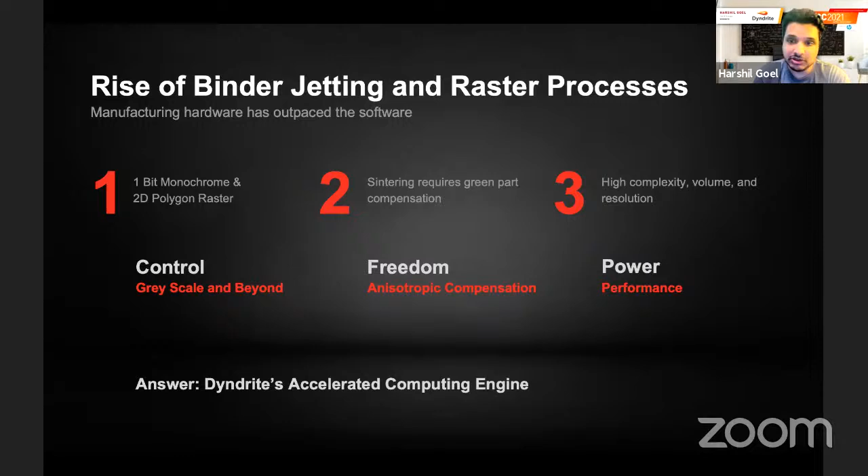I'm thrilled to announce the set of raster processes, announcements, and APIs that we've developed. I believe that they're going to dramatically push the limits of what's already possible. They're certainly pushing them already with a number of key partners. You can imagine what we're probably trying to do with Xaar to simply push the limits of what a printhead could even do.

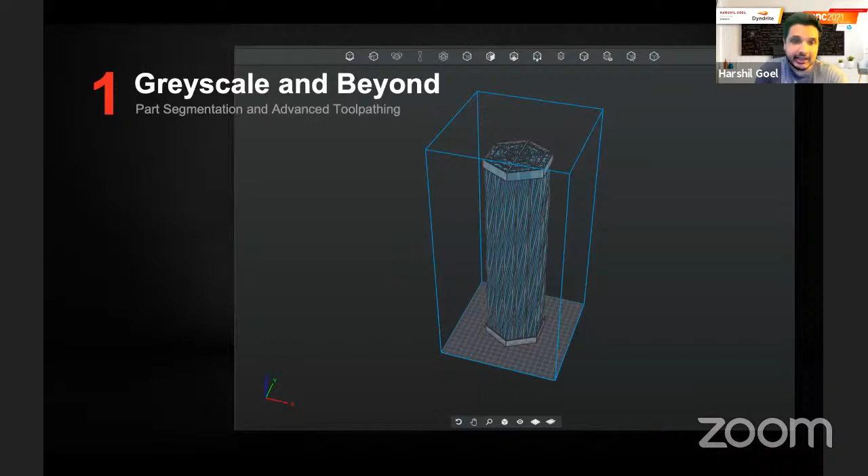So let's dive in a little bit deeper into one of these topics, grayscale. The idea here is when we have parts, we want to segment them and we want to apply advanced toolpathing. In a raster setting, advanced toolpathing can mean all sorts of things like dithering, anti-aliasing, etc. We're today going to be focusing on grayscale and beyond.

The idea is to take a part and divide it up into all of its key segments, whether it be the core, the shell, whether it has a lattice structure, the outside, the inside, specific areas near the shell. The idea is that we can embed metadata into all these processes.

But to what end? What you're seeing here is a high DPI image that has come out of the engine. The idea is to take this data and dramatically improve the printing process, whether we're enabling functionally graded materials, creating an efficient way of generating challenging bit files, or handling metallic components and exposing different ways to make improved coils, heat exchangers, nuclear reactors, etc.

The idea here is we can use this grayscale to fundamentally solve major physical and material graded problems. With this extra dimension now available in the toolpaths, the types of parts that people can make have significantly improved. We suspect people will use this to improve part quality and finish, because now you can have a graded grayscale on the edges.

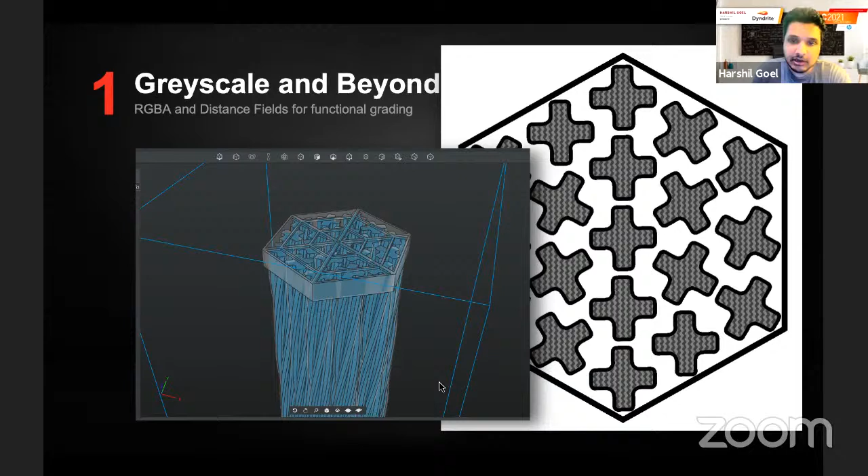The next key thing we'd like to talk about is anisotropic compensation. It's clear that for mainstream adoption, we need tighter tolerances, and this needs to happen much faster. We can't spend 10 to 15 hours compensating something just to print it and hope the green part comes out the right way. So to address this fundamental issue, we decided it made sense to create a number of geometric APIs for generalized anisotropic compensation.

The idea is that right now, if you give the engine 6 scalar values, 3 for scaling in X, Y, and Z, and 3 for offsetting or compensating in X, Y, and Z, you're able to attack these hard and difficult problems quicker, better, and faster. You're using the GPU to fully modify all of these images.

And what does this mean? It means more materials, more part families, more printer companies and ISVs generating IP, and faster qualification. The idea here is we're trying to build the tools to fundamentally accelerate how quickly people can develop sophisticated strategies. It's our goal to essentially be the best mathematicians in the room and enable every one of our partners to generate more IP to run their machines to the limit.

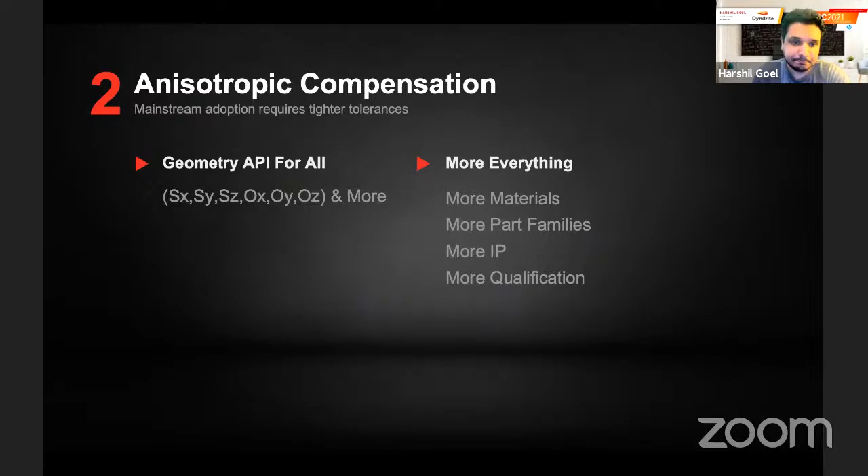Of course, showing anisotropic compensation is difficult because we're talking about microns, not meters. The idea here is we're specifically trying to show in this example how this anisotropic offsetting is being used in this raster process to calibrate the machine.

This is because we are offsetting in Z as well, and because it's a helix, we're just traversing further and further up the helix. Again, the idea here is not that we have invented the best way to compensate parts. The idea is we've been developing a generalized API so that more and more people can take a much more sophisticated approach to doing this.

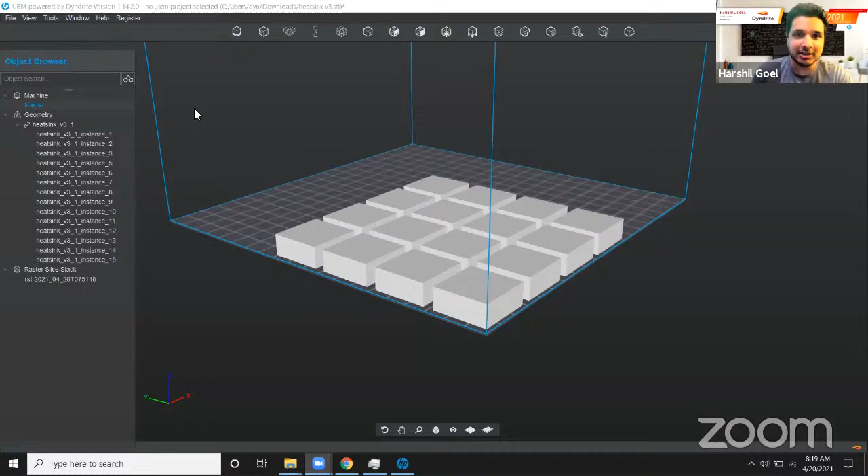Yes, all right. So what we have on the screen right here is a bunch of heat sinks. I have no idea how well this is coming across in the Zoom from a frame rate standpoint, but we are at 30 to 60 frames per second. And this is kind of a funny looking part.

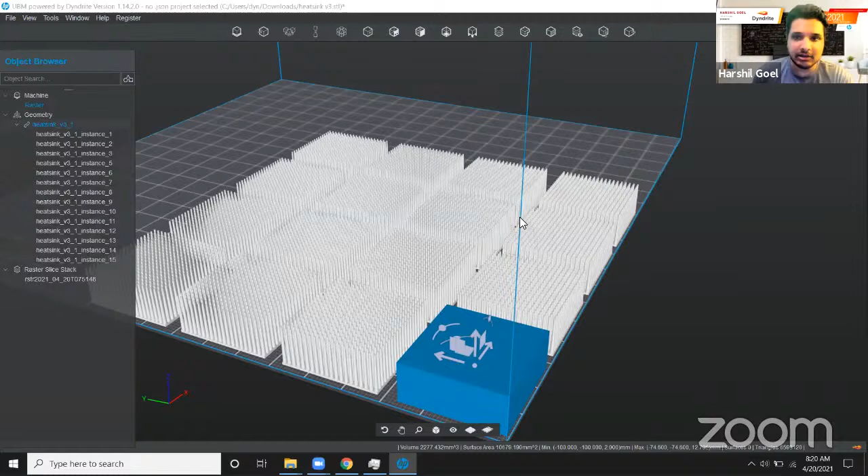The idea here is we're going to simply take this part and slice it at 50 microns. I will shut off the visualization so I can give the GPU as much memory as humanly possible. So let's hit apply.

But the idea is we're generating high resolution images for this heatsink, on the fly, live during the Zoom meeting, and we're already done. This is simply because the GPU has dramatically parallelized this process. So I'll stop sharing my screen and go back to the slides.

So why is this performance important? Well, a number of things, right? We're not doing performance for the sake of performance. We're doing performance for the sake of what it will engender and enable from a business process standpoint.

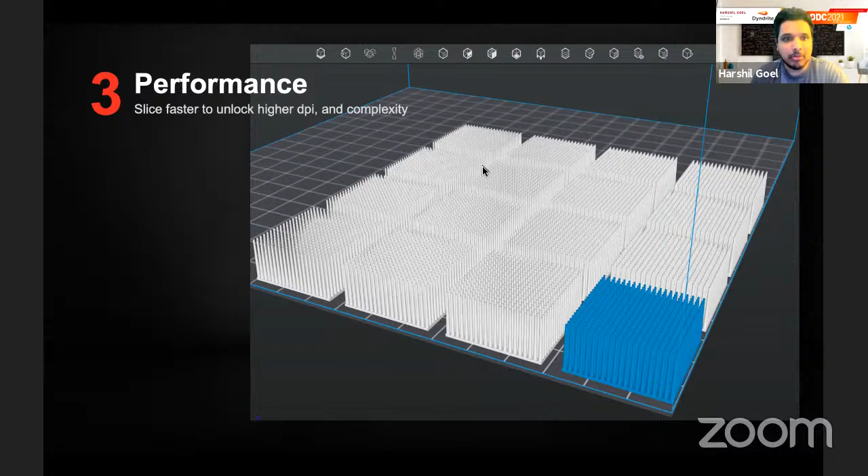Being able to slice significantly faster allows us to, A, try and test and simulate quicker, allows us to hopefully, B, keep up with the machine, and C, the performance is necessary because one of the key values of 3D printing is the fact that complexity is free.

But we all know that that's actually a lie. Complexity is not free. It's limited by your compute and your software. And so how can we, Dyndrite, figure out new and clever ways to use the existing software and hardware, and the new, for example, NVIDIA GPUs coming out, to push the limits of what's possible? Can we truly flip the paradigm of the manufacturing hardware being much better than the software?

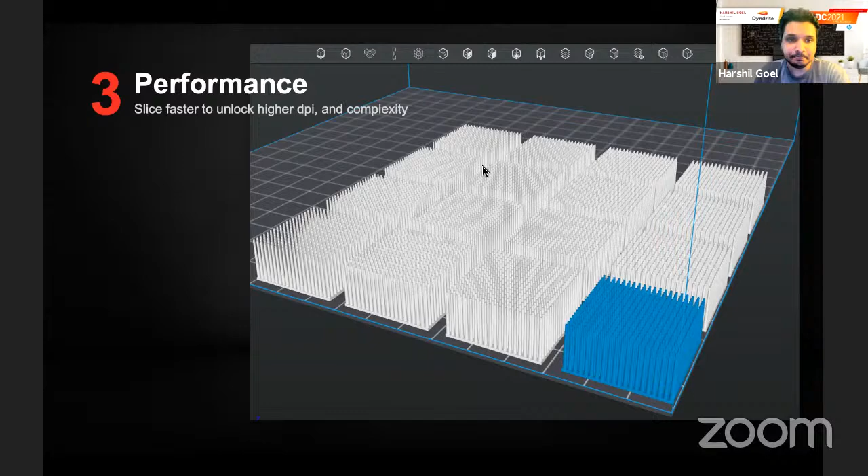So let's see if we can advance the slide again.

So we've been talking quite a bit about raster processes, and I'm sure there are a number of people in the room wondering what else could we possibly be doing? There is actually one more thing that I'm pretty excited to announce.

It's the concept of support-free printing that I think everyone has been seeing all over LinkedIn and social media and on the internet. The idea being that it's all about the toolpaths and what's kind of important here.

So the first pillar is a geometric query, right? Dyndrite is going to be providing APIs to enable sophisticated geometric queries. A number of folks are already familiar with upskin, downskin, and inskin, and applying specific parameters to those specific areas in a slice. But the idea is we want to offer a much, much broader set of geometric queries to enable something very clever.

The clever stuff is more and more advanced toolpaths and more recipes and IP.

The idea here is, can we figure out a way to enable every machine vendor on the planet and every single customer end user on the planet to quickly iterate in an automated way, to generate new toolpathing strategies, new geometric queries, and then codify that into IP and recipes that they can either sell, keep to themselves, or donate to the public domain. The idea here is we're developing APIs to enable this IP generation and development, and again, to provide the fastest mathematics engine on the planet.

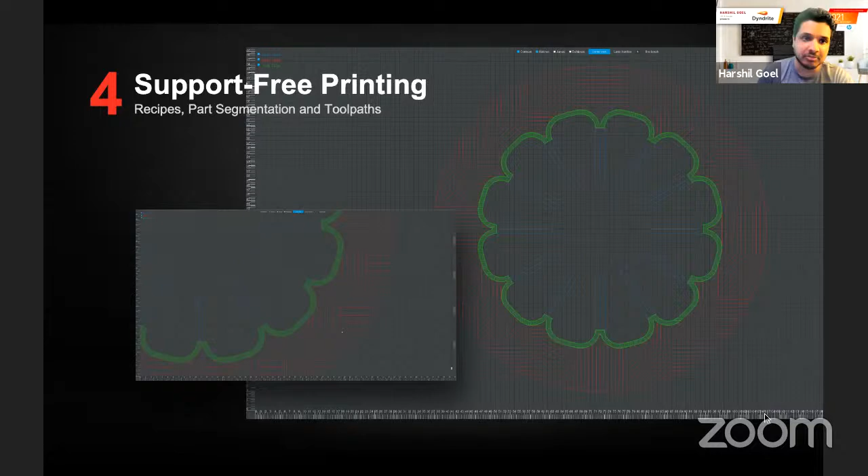The other type of query that we're enabling is the distance-based one. As you can all tell, we have a pretty darn fast voxel system internally. And the idea is that if you wanted to detect fins or near surface features, you'd simply use our raster processes in our voxel engine to also enable these very fast and very sophisticated queries. So let's go generate zones with the distance field.

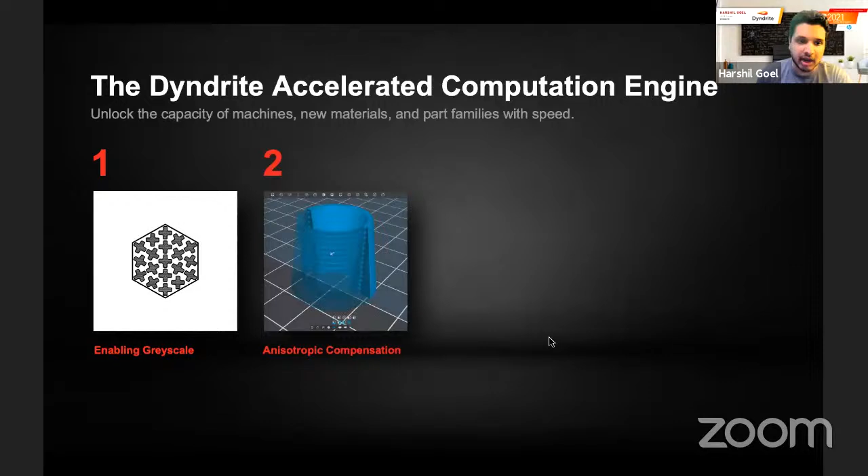So in summary, we're enabling grayscale to enable much more sophisticated toolpaths and raster-based processes for binder jetting, DLP, SLA, etc. We are enabling a broad-based general anisotropic compensation API to help all the ISVs and printer companies in the space.

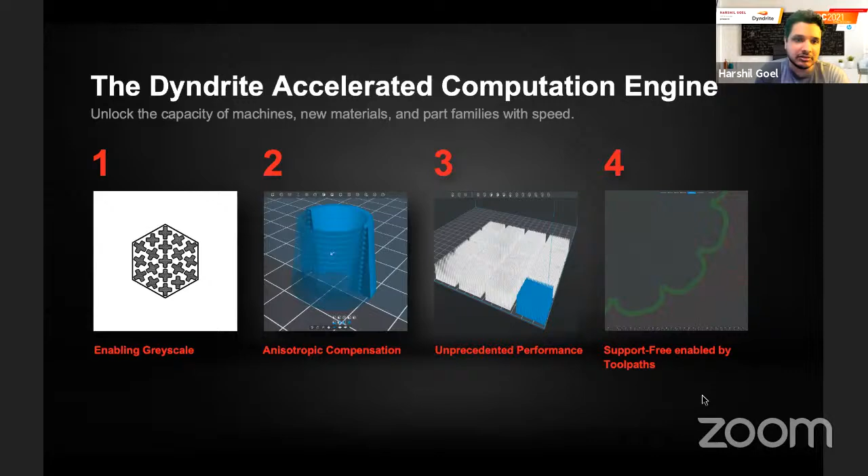We are, of course, upping the ante in performance yet again. I was seeing a number of benchmarks recently that showed another 1 to 3x improvement. And then finally, we want to do something similar in the vector space, and the first area we're targeting is toolpaths to enable support-free printing. The idea here is to unlock the capacity of the machines, new materials, and new part families with speed.

As mentioned, Dyndrite's mission is to fundamentally change how geometry is created, transformed, and transmitted on a computer. We've seen what's happened over the last 30 years, and I strongly suspect the next 30 years are going to dramatically change where additive is going to go. It's going to go from a prototyping process to a production process. It's going to enable a metric ton of IP to be generated, and it's going to fundamentally change the way we decide to manufacture things and how supply chains operate on our planet. I want to take this opportunity to thank all the attendees, developers, and DDC members.

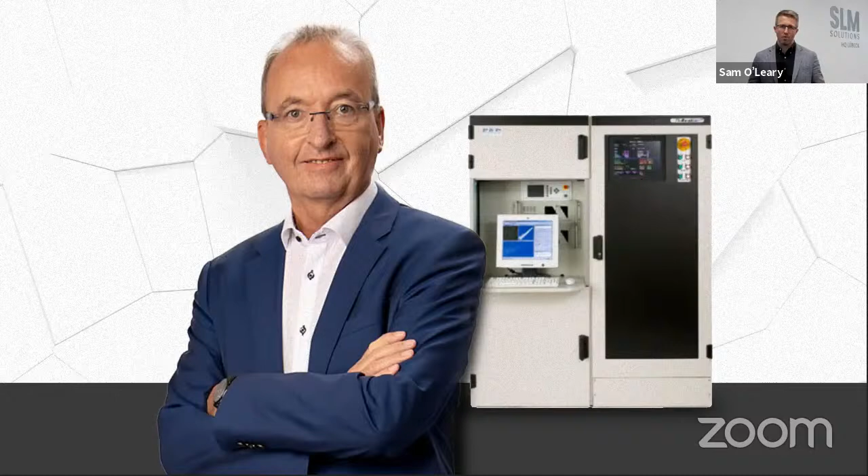25 years ago, build envelopes of these systems were tiny, roughly 15 liters in volume. Today, our build envelopes have increased dramatically and can hold a whopping 216 liters. To put this into perspective, let's use the example of something built on one of these machines the size of a matchbox. If this was done 25 years ago, the matchbox may have taken 24 hours to create. Today, it would be created in just a few minutes.

The cost to build the matchbox back then may have been between 500 and 1,000 euros. Today, maybe 10 euros. And unlike that bygone era, metal 3D printers can be unattended as they pump out production components day after day, week after week. This would have been impossible a couple of decades ago.

As you can imagine, this view on additive manufacturing from one of the pioneers of the technology is thrilling. And although it's clear we've come so far, there are still significant barriers to overcome for our industry. Despite many people claiming otherwise, if somebody tells you what is done here is easy, walk the other way. The build plate sizes are restricted, the part economics are hard to grasp, the materials are limited, the pre-processing software is a pain, and post-processing can be difficult.

However, in the past years we have worked tremendously to engineer solutions for these problems, and the results start to become clear. Today, despite obstacles remaining, industries ranging from space and automotive to energy and health realize that the promising world of additive is a solid and future way forward to implement their out-of-the-world ideas while accelerating their visions into reality.

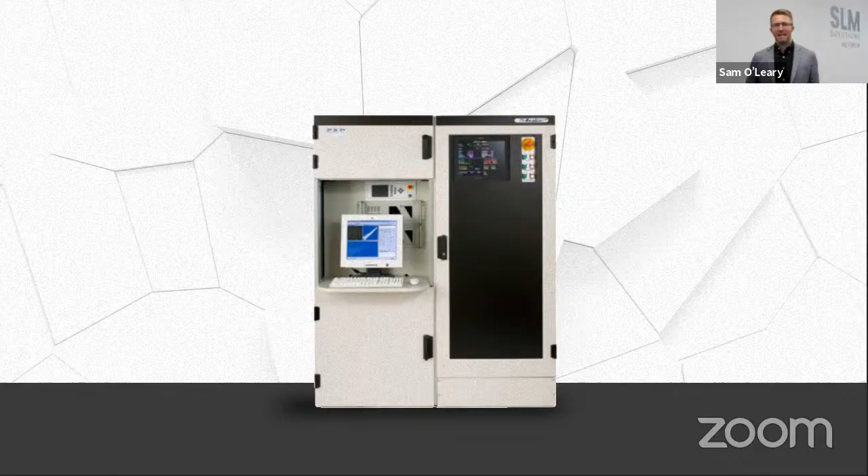Lately, additive's got a bit of a rock and roll reputation. Soon there'll be a 3D printer on Mars, things like this. But I want to start here on Earth, because there is no way that we will affect outer space without first affecting planet Earth in a cool way. So what's happening on Earth? Well, there are millions of people doing extraordinary things, while billions of us need exceptional solutions to the mechanics of daily business.

One way additive manufacturing is impacting people's lives is by helping to save them. Take Equinor. In a joint innovation project, we designed and produced an AM firefighter pump with a 70% reduction in weight and increased resistance to seawater corrosion. The lead time was reduced from 20 to only 4 weeks, lowering inventory capital and costs.

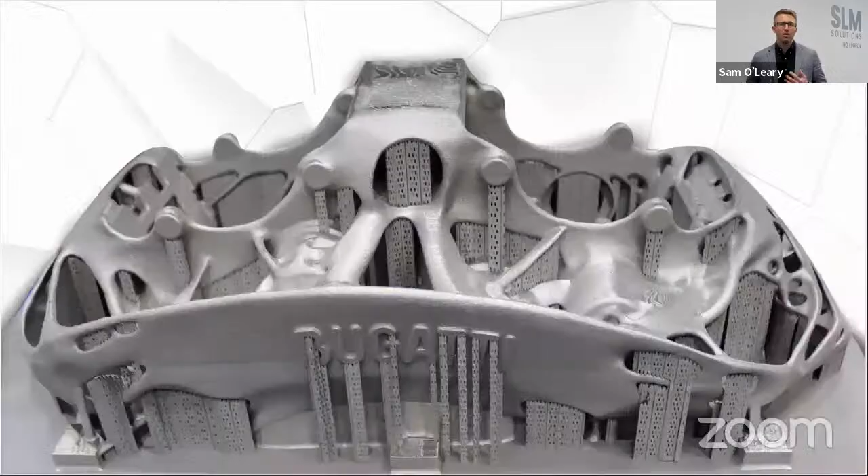And if we look at an automotive case, we have to bring up Bugatti and their brake caliper. Volumetrically, this part is the largest functioning titanium component built with selective laser melting. It can cope with extreme strength, stiffness, and temperature requirements. Caliper tests showed a tensile strength of 1,250 newtons per millimeter squared, and a material density of over 99.7%. We also worked with them to create a heat shield installed in all vehicles since delivery of the first Bugatti Chiron from the production facility in Molsheim.

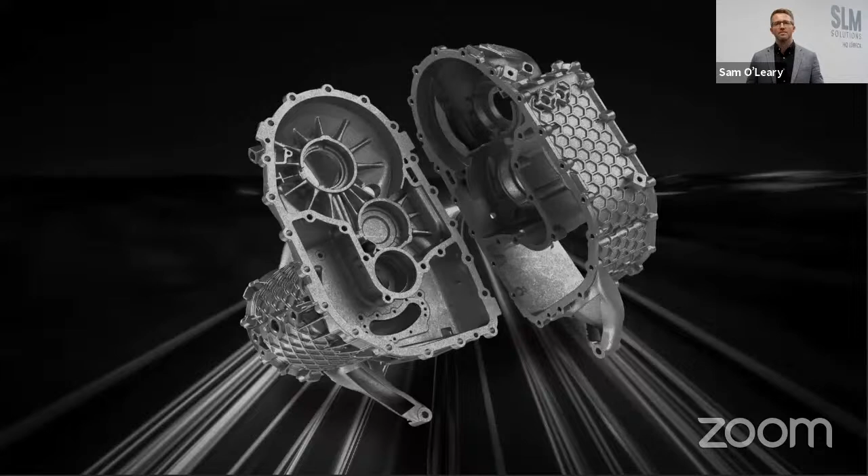It's also worth mentioning our proof of concept with Porsche using the SLM Solutions NXG12-600, where we successfully printed a complete e-drive housing with innovative AM design. All the advantages of AM have been implemented in this housing, such as topology optimization with lattice structures to reduce weight, functional integration of cooling channels, higher stiffness, and reduced assembly time by the integration of parts, as well as improvements in part quality.

To something a bit more related to normal life: in the transport sector, we have worked with 3DNA using reverse engineering to 3D print trolley heads that connect each bus to the network's aerial power supply lines and mechanically guide rods to the bus's roofs. Today, there are no trolley heads left that have not adopted AM technology, cruising around the beautiful city of Naples.

And if we take to the skies, our joint project with Safran Landing Systems, where we've successfully implemented our technology to produce a component of a nose of a landing gear for a business jet - a world first for a part of this design, redesigned for metal-based additive manufacturing. Additive guaranteed time savings, and a huge 15% weight reduction.

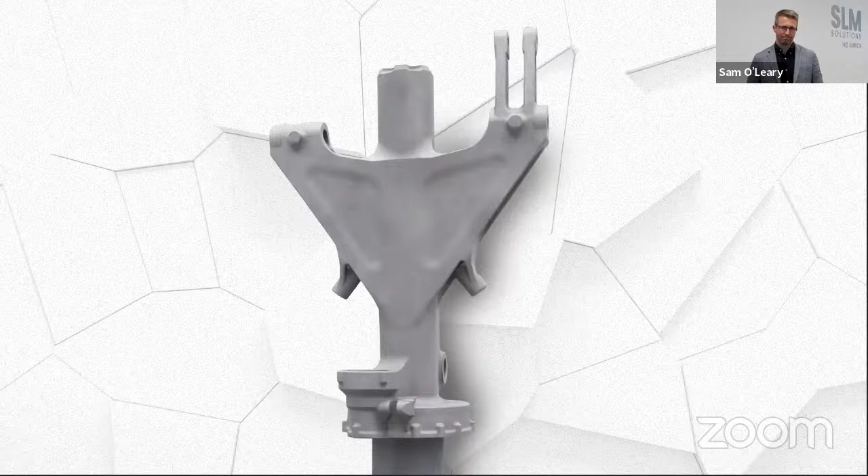From those stories, we are getting solid indications of what we can do for our customers. We see it every day. We see it in the factories of our many customers who operate production fleets, and we see it by looking at the output of those fleets. But we always want to go further and ensure customer success in more ways than the machines themselves. We want to replicate the success of some of our most mature customers and democratize that.

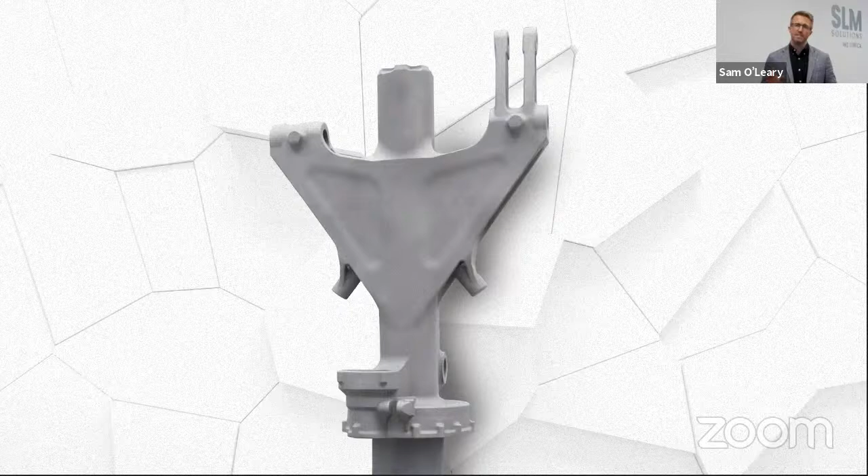This brings us to talking about an additive manufacturing future that is almost at our doorstep - a future where it is more automated than ever before, and it's not a highly skilled process today. Of course, this is a dream world where everyone gets their kicks thinking about it. It's like both engineers and OEMs want the same. It's not even far away, because many of the goals we set for the future, we are already implementing in our current processes.

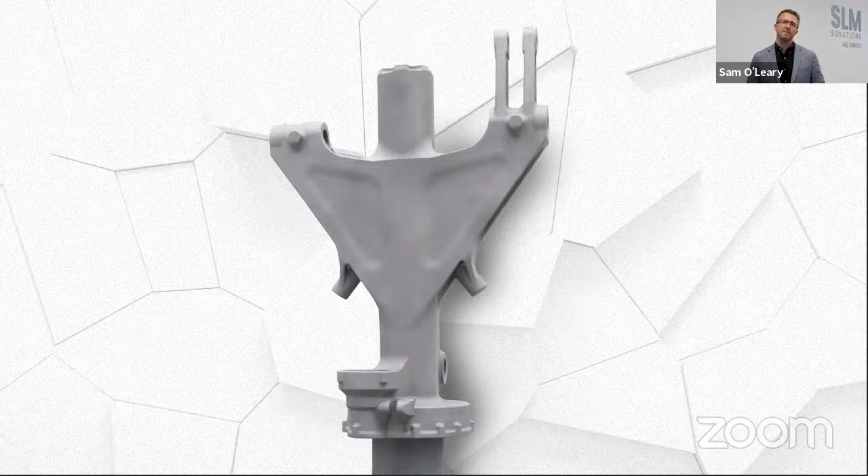I'm talking about a future of AM where customers don't just have machines, but have an entire ecosystem integrated into day-to-day operations. And how will we continue doing this in the future? By a course of action that extends much further than the mere purchase of a system, into an overarching living solution where your systems grow with capabilities as you grow and develop your visions.

And how do we do this? We make it open. In fact, for the future of AM to come to its tremendous potential, it has to be this way. How do we unfold the future using open architecture to get closer to a plug and play reality? Firstly, we get there by applying our 25 years of experience and knowledge in everything we do. And again, not just doing this alone - us providing interfaces to the likes of Dyndrite and many others, all of whom can enable more of what our machines can do.

Yesterday, I spoke to a customer. It was thrilling. She said, I know how to get more out of your machines than you do. And this is a compelling and motivating statement to hear. This is because you realize that sharing knowledge enables our customers to do more and allows them to move forward. And in return, it allows us to enable and improve our systems, improve the software, improve the interfaces, and in the end, improve the output and the industry.

So if you're an AM company saying, I am the machine manufacturer, I am the forefront of all knowledge, I don't allow anybody to change things, I know best, I don't allow engineers to play - this is a big problem. This is a big problem because you'll never know more than your customer in how best to produce a turbine vane or how best to produce a brake pad for a train. The people who have designed these for years and know the operational conditions, they know how to do that.

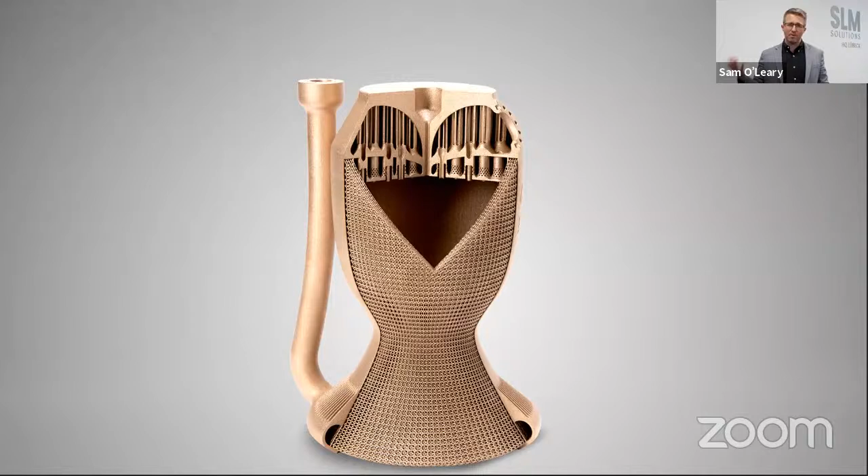Customers will always be reliant on good quality powders, good quality build preparation software, good quality open interfaces to pieces of hardware that run a reliable industrialized software base and hardware base. They are reliant on proper quality assurance methodologies, whether it's in-machine melt pool monitoring or CT scanning afterwards. It's then a matter of industrialization into a factory setting.

This could be how us, as a machine manufacturer, provides open connections so that people can connect it to a factory management system. They can visualize factory planning. This is how you enable automation at scale.

So how do we create a course for action? Of course, in some ways we are on course, but the way we wholly achieve it is not by one company or by one piece of technology. Instead, it's a broad ecosystem that leans on the applications of multiple complementary technologies.

Leading back to the idea of working together by bringing our expertise and your expertise to the table to find solutions. This means partnering up. In turn, this will enable our fundamental goals of doing what it takes to realize the future of delivering what our customers and what the industry needs.

Essentially, giving the toolkit to be successful and disrupt your industry as you grow. So what does it mean to disrupt the industry? Well, to start, it's the disruption of traditional supply chains. It's the shaking up of conventional business models.

It's the ability to produce 1,000 vehicles instead of 100,000 vehicles and still be within your financial goals. It's the moment in time when you can create just one part, courtesy of AM technology, before moving on to your next brilliant idea. This kind of disruption advances the pace of technologies and advances all of the improvements that we see in the operation of a piece of equipment.

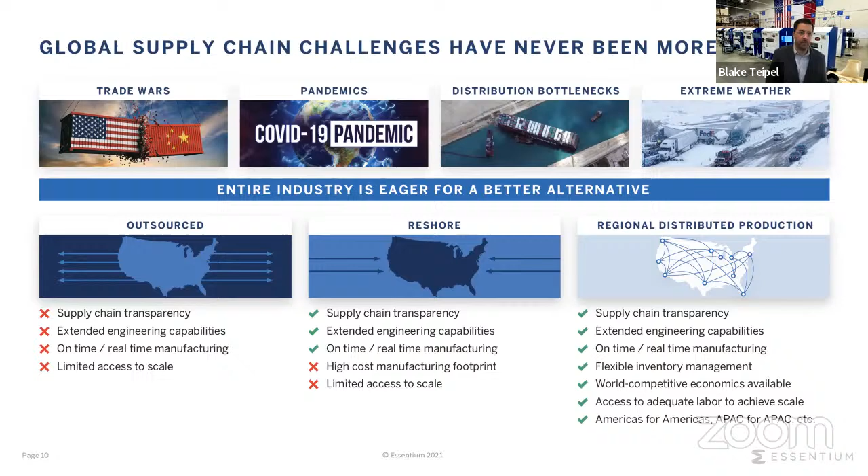So as you think about these challenges that we're facing with our clients, with our customers, additive is a great solution to pretty much all these challenges. And the manufacturing imperatives have never been more urgent, whether it's inventory reduction and supply chains, all the way through down to the transition to the digital factory. You think about that factory future is and will be digital in the future state, right?

This facilitates mass customization. It facilitates a reduction of tooling. It facilitates these solutions where you can make cars, as was highlighted in the prior talk, where you're bringing together additively manufactured parts, subtractively manufactured parts using automation, and you're doing so in a more custom scheme that sort of unlocks customer choice and a reduction in lead times and all of these other value propositions of which many of us are so familiar.

Because folks, if we think about where the industry is right now, there is an advancement in supporting technology. It's one of the things I love about joining this community, because we're looking at advancements in access to data through better use of computing horsepower, access to better simulation and all of these various facets. So is it hypey?

Is it buzzy to sort of say that Industry 4.0 is within reach? I really don't think so. I think that we're right on the cusp of all these adjacencies coming together through what the folks at HP are doing, through what the folks here at Dyndrite are doing, elsewhere in the community writ large. We're seeing this future state where Industry 4.0 is sort of right on the cusp.

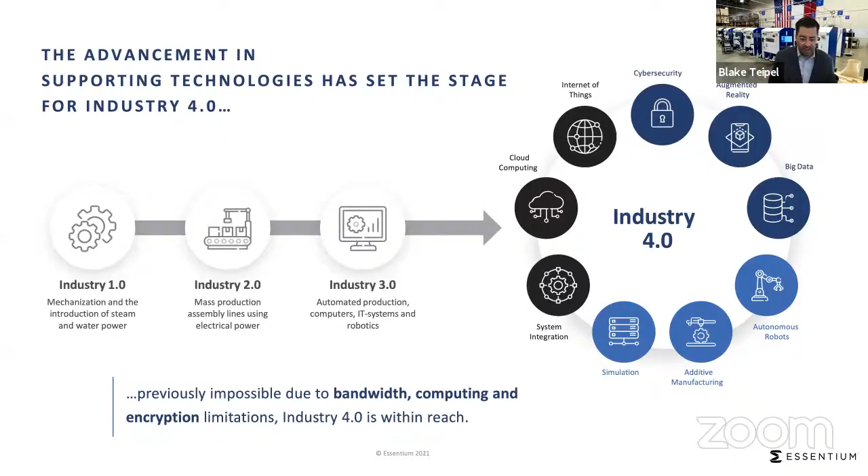Okay, so having said all that, I actually now get into the topic of the day, which is, again, additive 2.0 and the dual use lens, right? What is this dual use lens that people talk about? So forgive the next slide. It's a little bit—if the previous discussion was in bold strokes, this is very, very, very, very crisp.

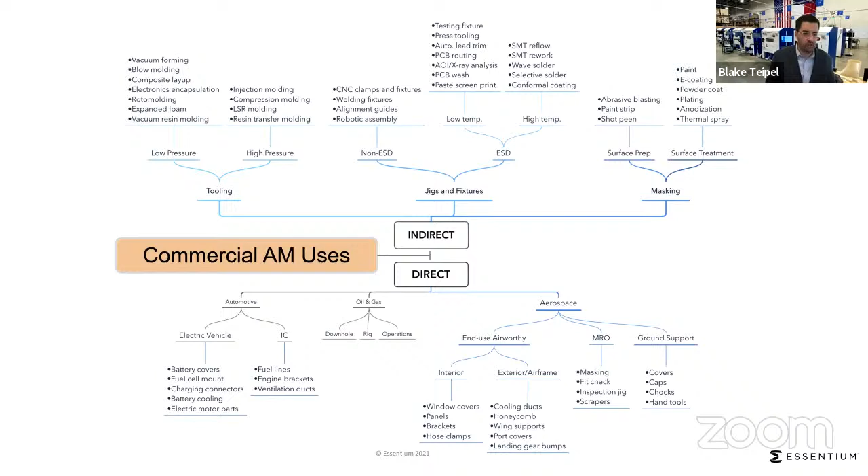So you sort of have these use cases, right? And so very hierarchical, very detailed. All of a sudden, we're getting right into the weeds. So we've got tooling and jigs and fixtures and masking and automotive, oil and gas and aerospace sectors, just to name a few, right? And so here are some of the use cases where we can bring about this factory level change, this manufacturing process flow level change. Well, these are the use cases that you see in commercial AM, commercial additive manufacturing.

Well, the good news is that they're actually the exact same use cases that the governmental users are facing. Whether you have to service an aging vehicle, if that's an airplane or a car or some sort of transport solution, nearly all of our transportation that the government uses at the end of the day is actually pretty old. If you look at the serial numbers, if you look at the generations, the F-22 was the first military aircraft designed solely in CAD, right?

So everything else has this very old architecture. And so you have to service it. You have to support the sustainment of the solution at scale. And so you need a low cost, distributed digital lens in order to make that solution come about at scale. So what does that look like if you're in the government space?

Well, they have a cloud solution that they need to bring about where you have distributed network architectures, you have distributed manufacturing solutions in the form certainly of Essentium's HSE printers and other solutions, but you basically connect to the cloud. You have all the metadata, you have the technology data packages, and there are technology data packages that have to be designed for airworthy parts in this case, or they're designed for ground support parts. So components that touch airplanes but don't fly, and then components that fly on airplanes.

Well, all of that has metadata. It all has QMS and COA and specs and all this information that has to be created, curated, checked, protected in a trustless environment.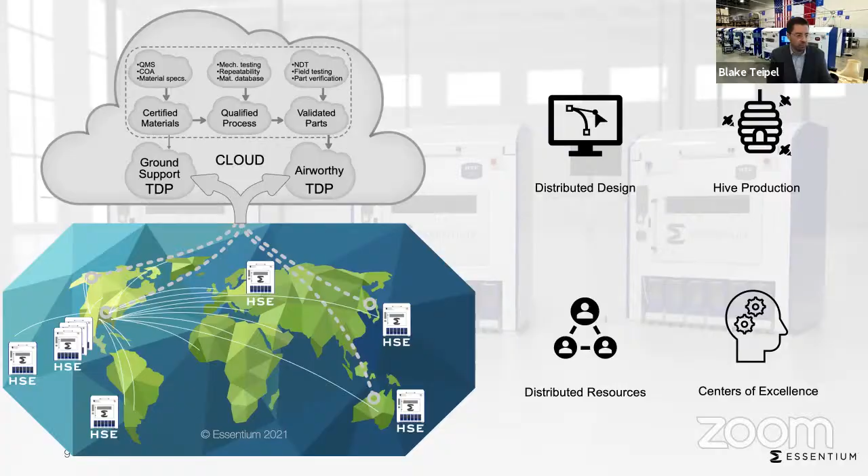You have to have distributed design, distributed resources, hive production, and all of that boils down into centers of excellence as we start to see these solutions rolling out. We've got an example of that at Essentium—I invite you to come see us at our headquarters in Austin, Texas. We've got a first use case of a hive and center-of-excellence based model that we're building.

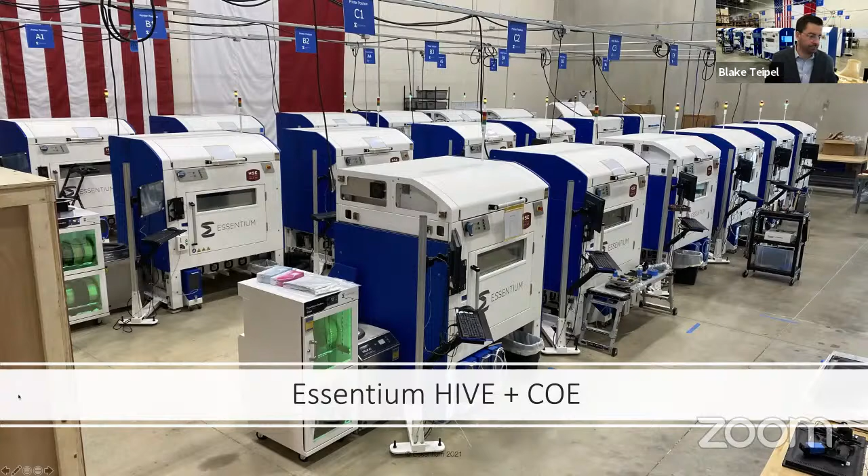We're building parts, building solutions, building use cases, and rolling this out across the government. What does that look like? Let me give you some specific examples from the lens of a dual-use environment. The first step is the same whether you're focusing on a government client or a commercial client: you have to define the customer requirements for the material. What is the material requirement that you need at the end of the day?

I couldn't agree more with the previous speaker, Sam's point—we have to bring about a future state where that is open, whether it's powders or filaments, as in Essentium's case. We have to bring about a state where the customer has choice, where the customer defines what their usage environment is. Then additive manufacturing companies need to work with those clients at scale to pick a polymer or composite from the pyramid that fits the requirements for chemical resistance, functional properties, thermal, mechanical, and the rest.

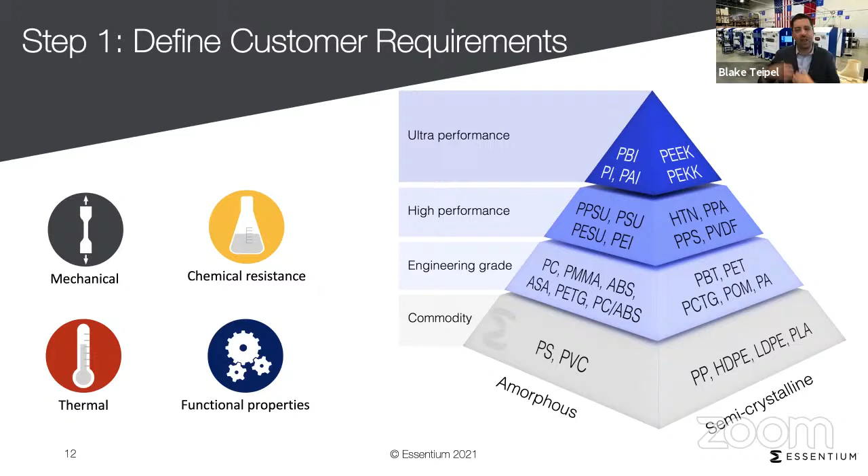I'm happy to say there are a lot of solutions here. The costs are coming down, the access is improving. And if additive manufacturing becomes truly relevant to Industry 4.0, the entire ecosystem must resemble the ecosystem we see at scale in conventional factories, in actual manufacturing.

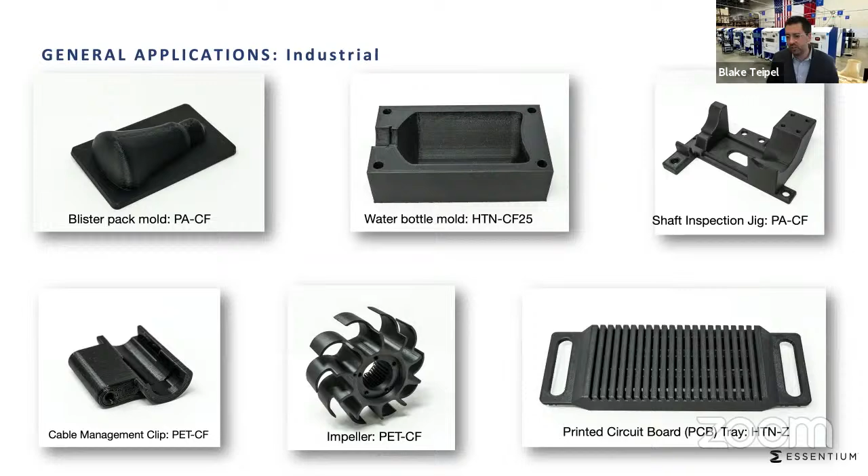You can see general applications in the industrial space: molds for light bulbs or items needing blister pack solutions, water bottles for blow molding, shaft inspection jigs, cable management clips, impellers, printed circuit board trays that are electrostatically dissipative and clean-room safe. If you print these parts with an open architecture and a cost-effective solution, you can save your client time and money at scale in a material way. This is what we need to see for folks to change their behavior, adopt new technology, and for Industry 4.0 to come as additive manufacturing becomes unleashed.

Because additive manufacturing, make no mistake, has been stunted. The industry has been slow to grow. So let's look at the aerospace sector, both governmental and private.

In the case of these red parts, this is a TPU anti-stat material used for protecting satellites from foreign object debris. These are covers placed on satellites that are removed prior to launch—literally 3D printed, with 'remove prior to launch' on the bottom of the cover. Then you have assembly jigs, again to put satellite arrays together prior to launch.

On the right-hand side, you can see aluminum replacements. We're starting to see cases where you need to service a very old airplane, and wing skins may be delaminating from phenolic resins and honeycomb structures put in place in the 60s. Instead of machining the part out of aluminum, we can print it now, having conducted adhesion tests to confirm that a polyetherketoneketone-based chemistry will adhere using drop-in adhesives to the aluminum skin and structure above and below it. We're starting to see massive solution opportunities again at scale.

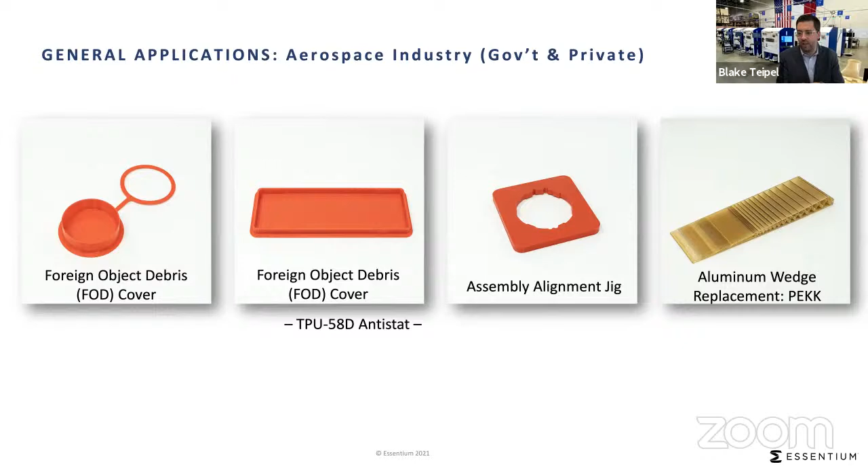These solutions save on average more than 95% cost and time. So friends, this is a great moment in the additive industry—a great moment to celebrate together the victories we can all cling to, because it's not just about one company or one technology. It's about the ecosystem, us building together a future state where a rising tide lifts all boats.

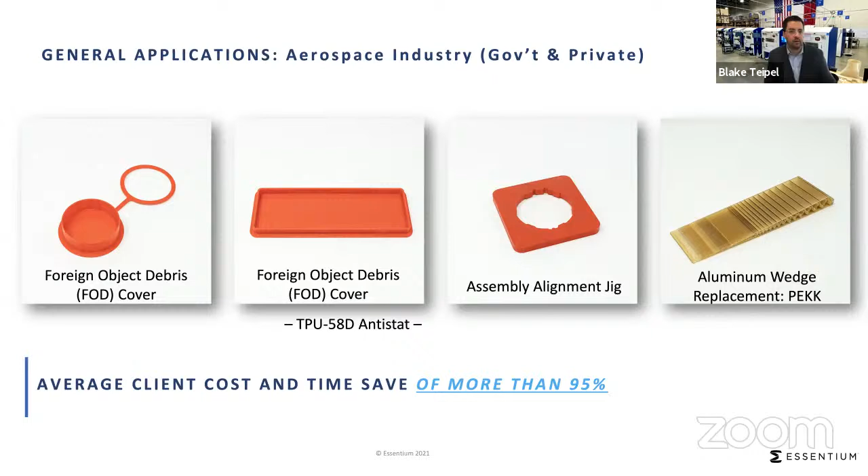Here's some more examples. So we had ground tooling.

This is all government examples. We had FOD covers printed from carbon fiber materials, FOD covers printed from TPUs, radio trays, simple stuff to keep very expensive radio equipment from falling, breaking, and being difficult to transport. Very large parts at times, leveling fixtures.

This is a 6.4 kilogram part, 19.7 inch or 500 millimeter in diameter, printed in about 36 hours. You also have drip pans to keep solvents, avgas, and hydraulic fluid from spilling and causing health and safety problems.

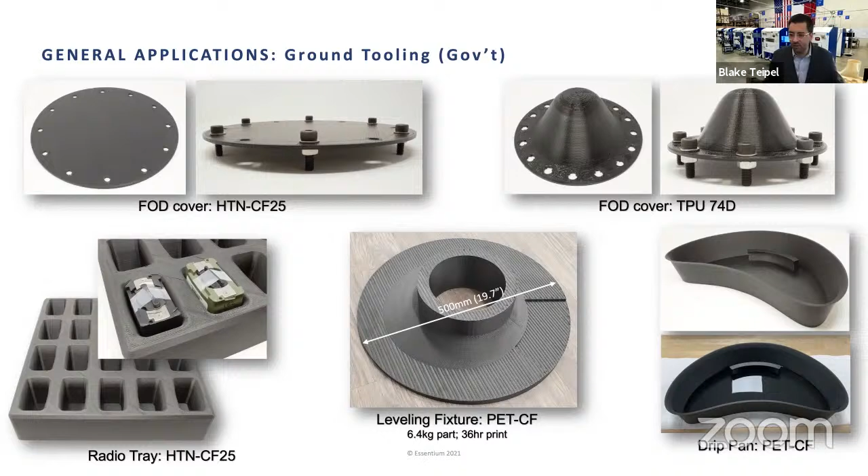Back on the commercial side, we had examples where there were major bottlenecks in conformal coatings for printed circuit boards. By printing masking technologies for PCB and PCBA solutions using electrostatically dissipative safe materials, we were able to help our clients cut their costs by more than 90%.

These are the solutions that are needed at scale to help improve access to new technology and new lead time cuts. On average, there's over a 77% increase in efficiency, and we're cutting labor time significantly. Also with another client in the high spec automotive and motorsport case, Kozlowski Advanced Manufacturing.

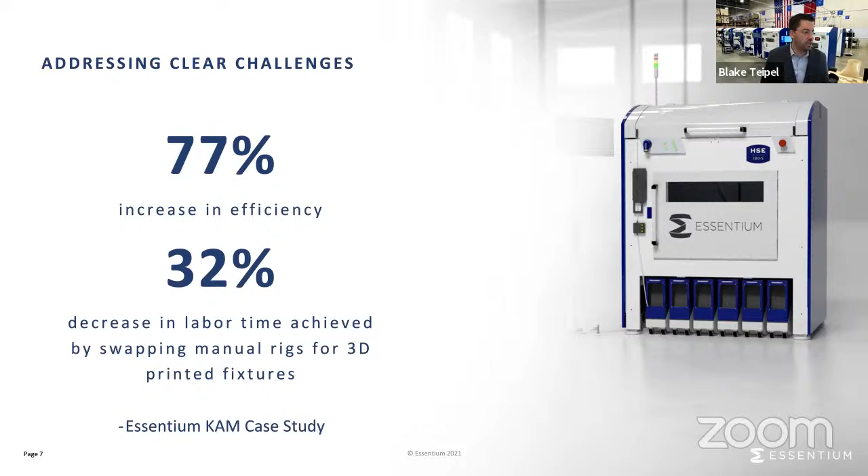But it's not just Essentium, and it's not just SLM, and it's not just the parties here today as part of the Dyndrite community. Additive manufacturing is anticipated by an MIT study that was recently published to see over 90% cost reduction over traditional manufacturing.

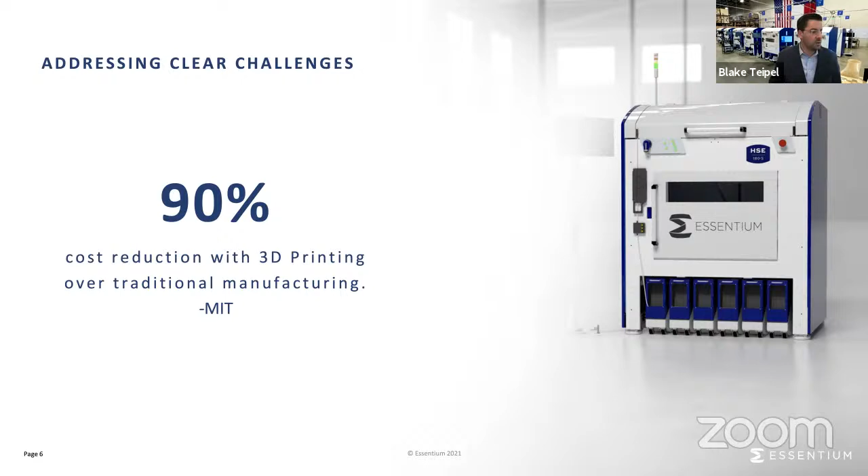So again, friends, this is a great moment, a great time. But what is another future idea, another future example of how we stay ahead of the curve? 2021 and beyond, how do we stay ahead of the curve?

Well, design for additive is one of the next frontiers. So I grabbed some images from the Wohlers report, and I just sort of said, okay, how do we communicate this true opportunity for part consolidation, lightweighting, better design freedoms, and these other improvements?

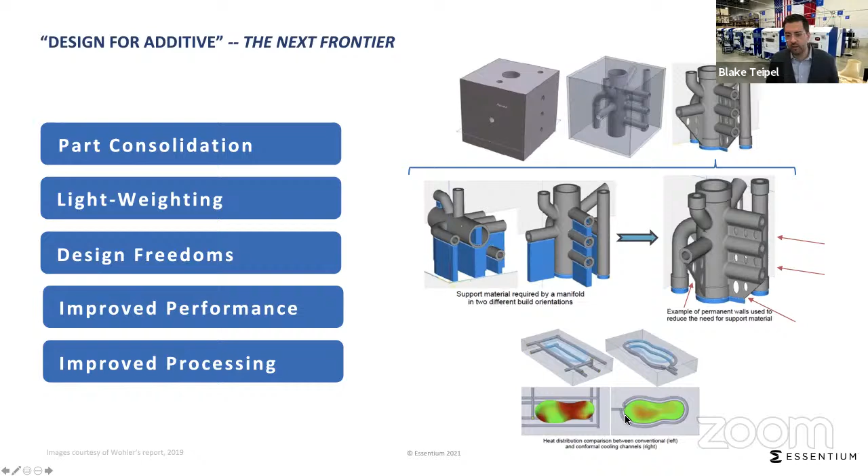As you move into this future state where the knowledge base is accessible and transferable, the materials are open, the machines are fast, we start to see design choices being made to minimize supports, improve print orientation, and increase throughput. Also for conformal cooling, that creates better parts using additive than could otherwise have been created using subtractive.

So we need to ask ourselves, right? How can we help prepare for Industry 4.0 now? How can we help our clients prepare for that?

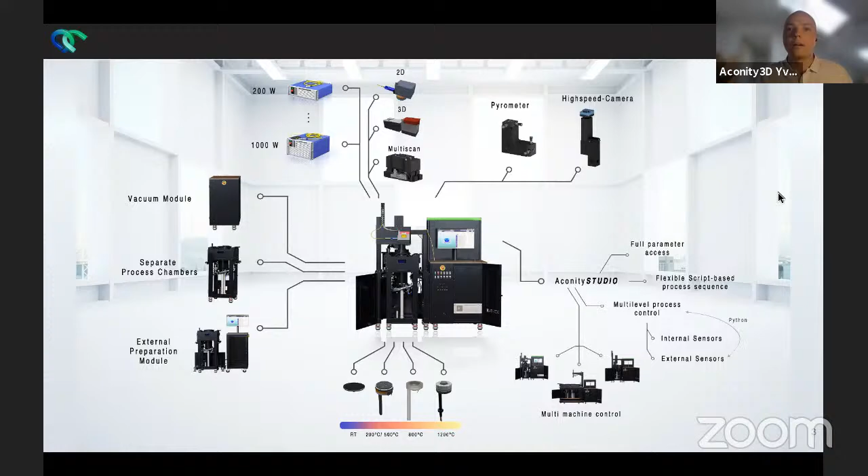What that also allows is that customers can log into our Python API and actually control the machine without even needing our graphical user interface. That's our interpretation of true openness, shown here in our 4 basic systems: on the bottom right-hand side, our AconityMINI entry-level system; our AconityMIDI family, which can have exchangeable process chambers for increased productivity or parallel setup times; and the AconityONE for larger-scale full production approaches.

What I want to show here now are some examples of what you can actually do if you have access to truly open machine hardware and software. What we see here is an example, the video might be a little laggy, of magnesium.

So what you see is so much fume, so much steam within the process, because the process window is rather small that with standard machines, that cannot be processed. What you see here is we cranked up a little bit the fume extraction system of that system, and all of a sudden that becomes reality.

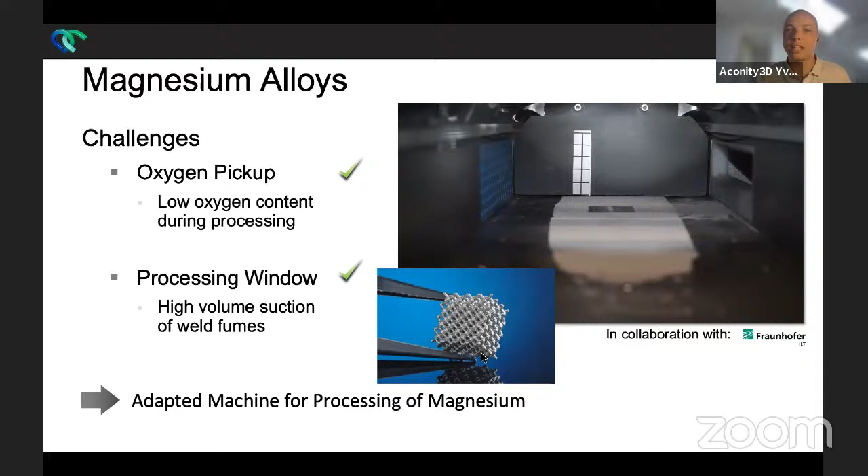So this is actually our very first AconityMINI machine, which was provided to Fraunhofer ILT, who holds a basic patent in LPBF. Their goal was obviously processing magnesium. They succeeded in doing so, which we see on the bottom hand example, where we have this little scaffold, which is actually designed for being bioresorbable.

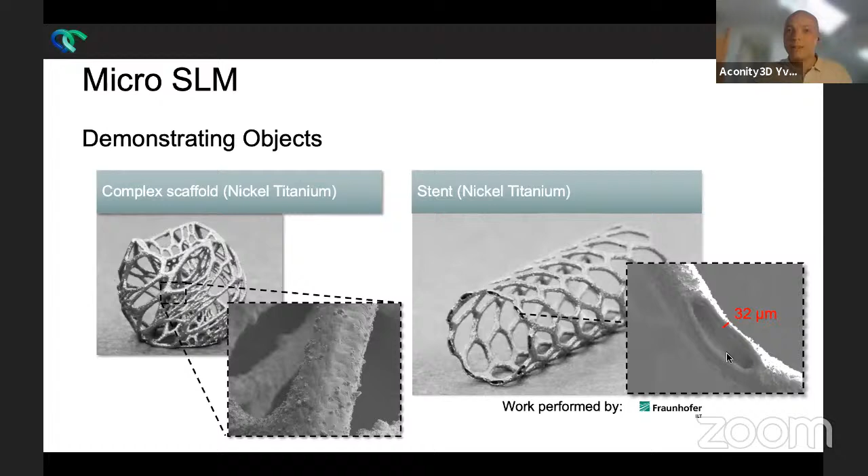So next example is micro SLM. I pointed that out. If you have true freedom of your hardware, you can easily just choose to have a really, really small spot size, maybe even modulate your laser, which will then allow you to do something like a stent with little wall thicknesses of only 32 microns with a material, in this case nickel titanium shape memory, which is typically not available in the whole additive manufacturing landscape. So that is what motivates us every day.

Other examples here, implementation of a green laser source. We are an offspring of the Fraunhofer Institute for Laser Technology, so we believe that is our bread and butter business. Of course, if you want to process different materials, you might need to change your tool of light. So in this case, what we did is we applied a green laser source, which then allows you to actually process pure copper in densities of above 99.5%.

Another example here, high temperature preheating, not needed for every application, not needed for every material, but you as customers most likely know if you need a preheating or not. In short, materials which are classified as easy to weld can typically be easily processed with LPBF. Materials which are classified as non-weldable, well, tough, they typically cannot be processed. What you can do here, in this example for titanium aluminide, is you just heat everything up to well above 500 centigrade, and that allows you to print titanium aluminide really dense, more than 99.5% density, with mechanical properties at least the ones from the cast process.

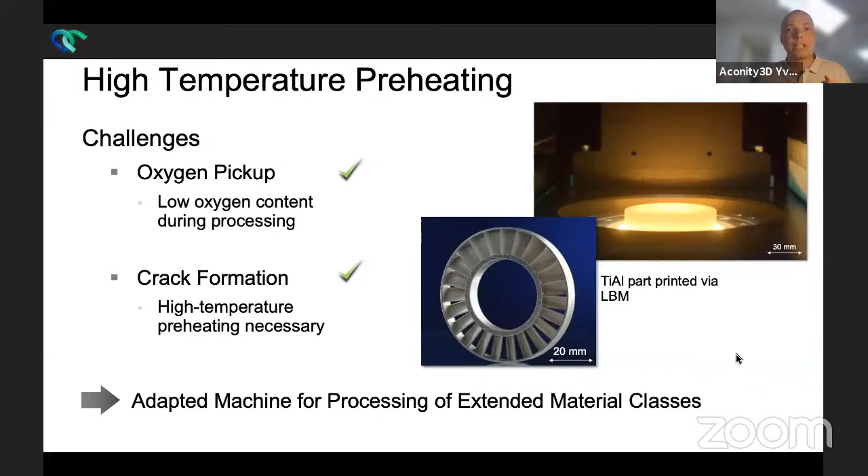So now you can use this flexible hardware equipment or this machine to actually extend the scope of applicable materials and make your new applications reality.

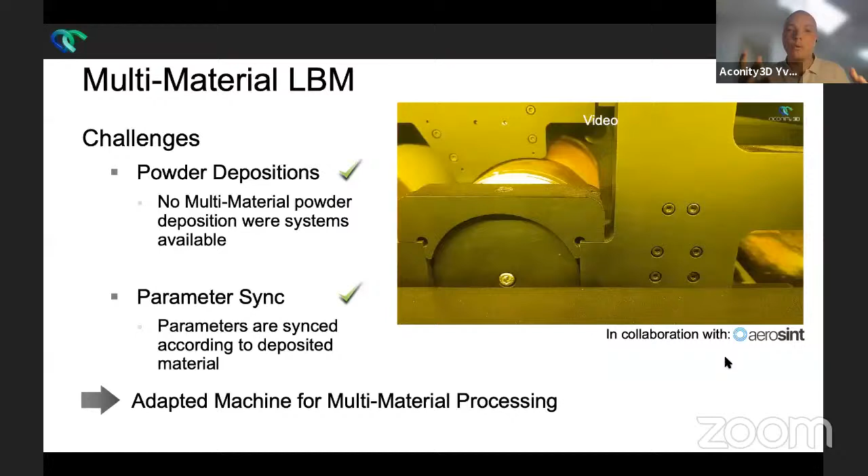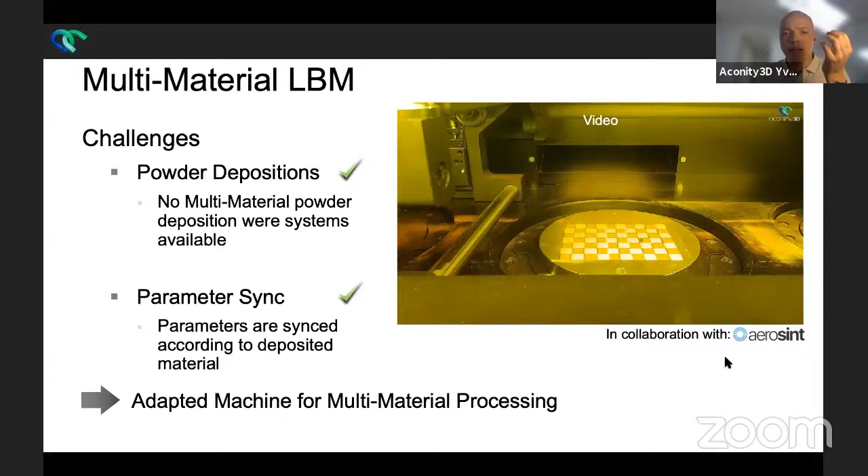Another example here is, I hope the video works, the multi-material approach. We have joined up with Aerosint in providing a multi-material recoating option for our Aconity MIDI Plus. We see that here, this is a recoating process. What we see here is copper and steel being provided on the substrate plate in X and Y. Now the information for the multi-material recoater is the same as the one for the laser, which we take. So what we did here is take different parameters for different materials, and that actually yields one of the first true multi-material parts built with LPBF.

Another thing, and now we come to the core of this talk, is switchable beam profiles. This means having flexible scanning strategies, not only from data preparation, which is what Harshal does really great, but also the possibility to change the process parameters which you want to apply for your individual business case. So we want to give our customers the tool to develop their own unique selling point.

One selling point might be, I need to be faster, I need to be cheaper. So how do you do that? You might want to have faster melting processes. One approach here is a laser source provided by nLIGHT, which can be changed into different beam profiles. So you can start with your typical Gaussian beam profile, and for more bulky parts towards more productivity, you just switch towards a ring mode, which has a drastically increased diameter while not having the overheating problem you would typically have if you just defocused your beam.

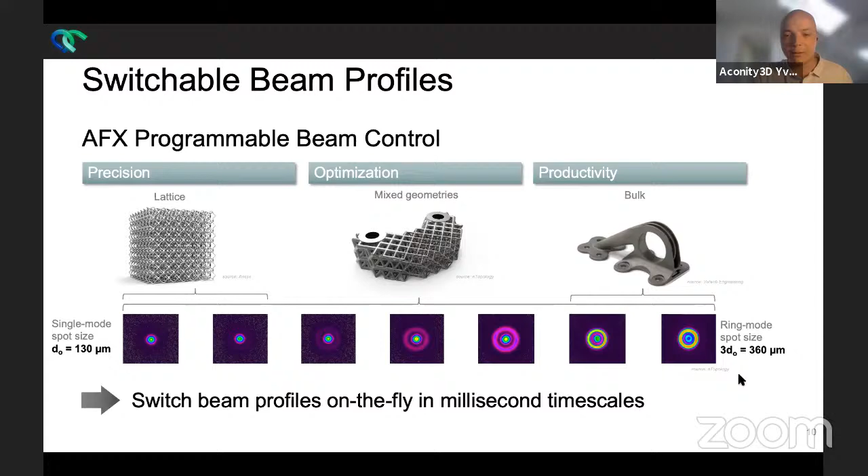And here's a video, please bear with me. This video is quite fast. I will play it again if it lets me jump to the next slide. Yeah, here it is, I will play it again.

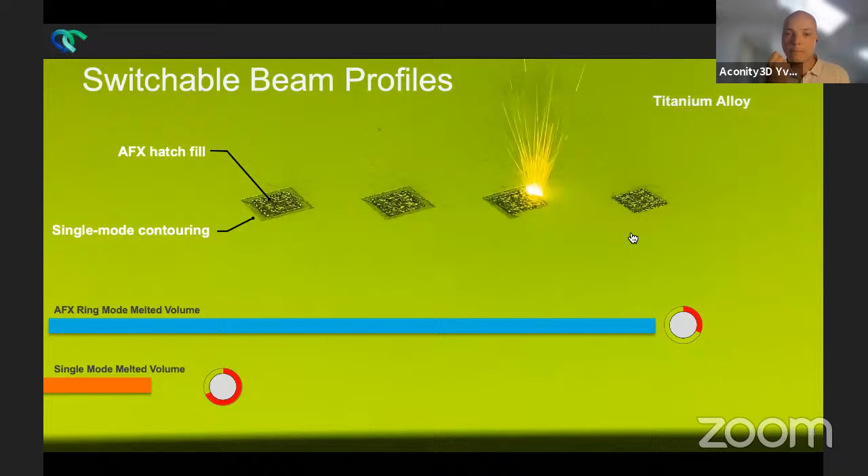But this is to illustrate, in the middle, the core has been done with this AFX ring profile, while the surrounding more filigree structure will still be printed with a standard laser. For this titanium alloy, we were able to increase consolidation rate by a factor of 7 just by exchanging the standard laser, just by providing flexible hardware and allowing customers to work with that flexible tool.

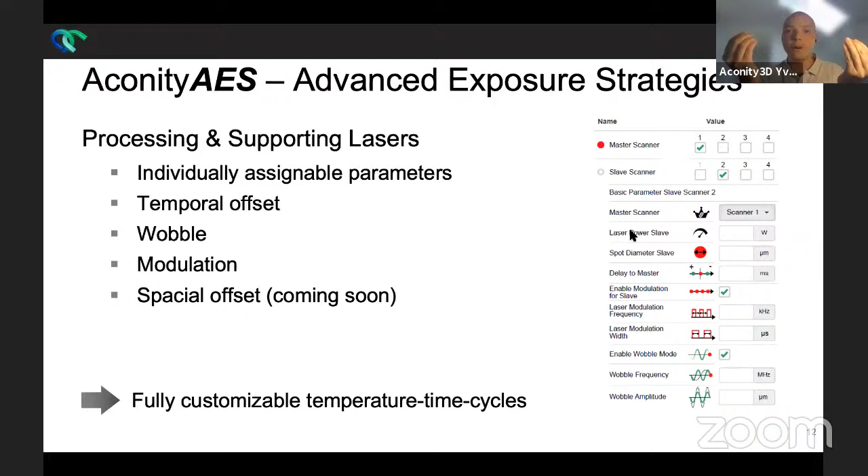Next slide is here, our processing supporting lasers. So now if you talk about multi-laser systems, which are really fun towards increasing productivity, now even more fun is if you define one laser to be the processing laser and the other one to be the supporting laser. Or maybe do that with up to 4 lasers. So here's a little schematic of what I mean by that.

You can just have one processing laser and a slave, so to say, wobbling laser. You can increase a time offset. You can just choose a defocus around your process laser. Or if you have many lasers, just go berserk on it.

And last slide here towards that is that we actually took a video doing our process with our high-speed process monitoring. So what you see in the middle in that video is the processing laser. Bear with me, it will slow down the video. And surrounding that processing laser in the middle, you see an 8-shaped supporting laser. Now it's a little bit slower, walking in 8. And if you pay attention real closely, you will even see that supporting laser is in ring mode. So that is the AFX laser provided in a ring to show what is possible here.

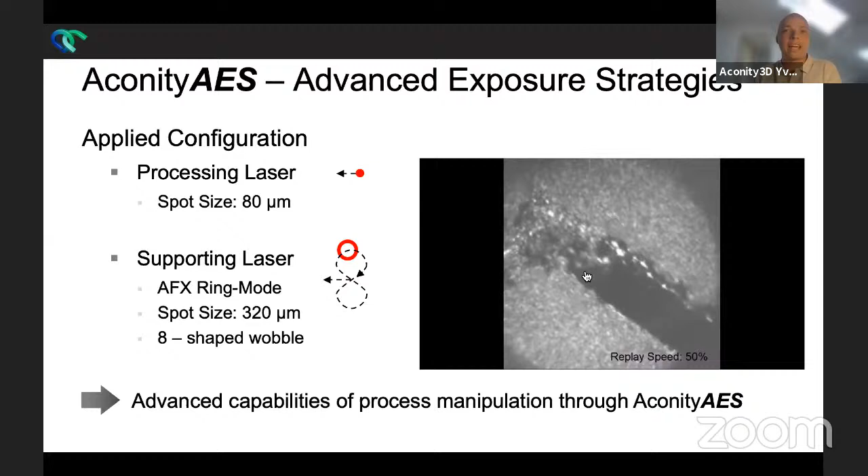And that is our approach towards flexibility, our approach towards providing tools for our customers on site, what Harshal does with Dyndrite next to data preparation, to have the flexibility to do what customers believe needs to be done for having their success story.

So in short conclusion, AM of metals, full potential in my humble opinion not yet reached, but we try our very best. The whole community, the whole industry tries their very best to do so. We have a material choice which can be extended by flexible machines. Switchable beam profiles allow for further manipulation of heating and cooling cycles of materials and allow for new material classes. Advanced exposure strategies next to data preparation can allow for full control of temperature, time cycles, and therefore, again, new materials, new business models on which we as a unified industry can work together.

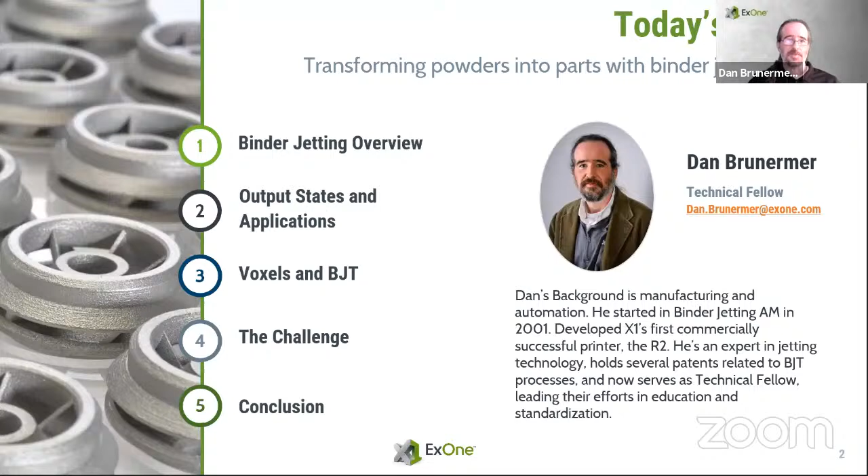Just a tiny bit about myself. I'll be celebrating my 20th year at ExOne this coming May 11th. I'm very excited about that. I've been basically in heavy industry before that. Coming out of college, my first jobs were in automation, one-off machines, instruments, that kind of thing.

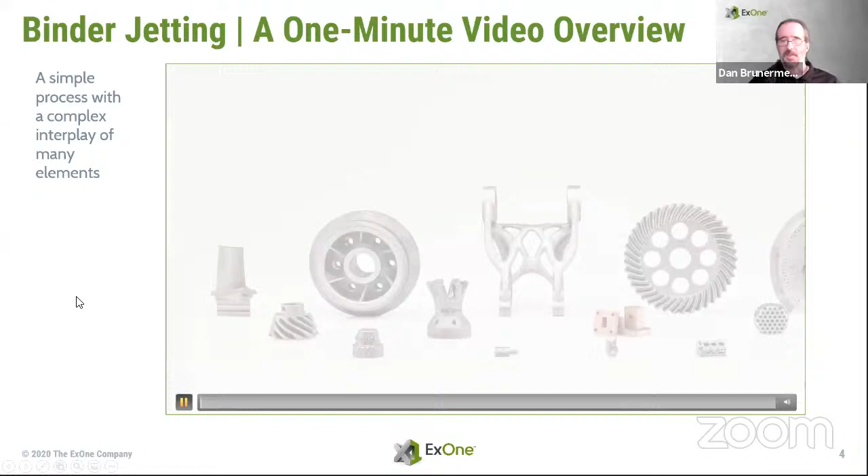So just a quick introduction to binder jetting, and I'm going to make you watch this one-minute video. I'll give a bit of annotation as it goes. This is a machine in mid-print. The first thing you'll see is the build box retract a little. The bed goes down, the recoating unit moves from right to left, and you'll see a little heating lamp. We have to dry off a little of that binder.

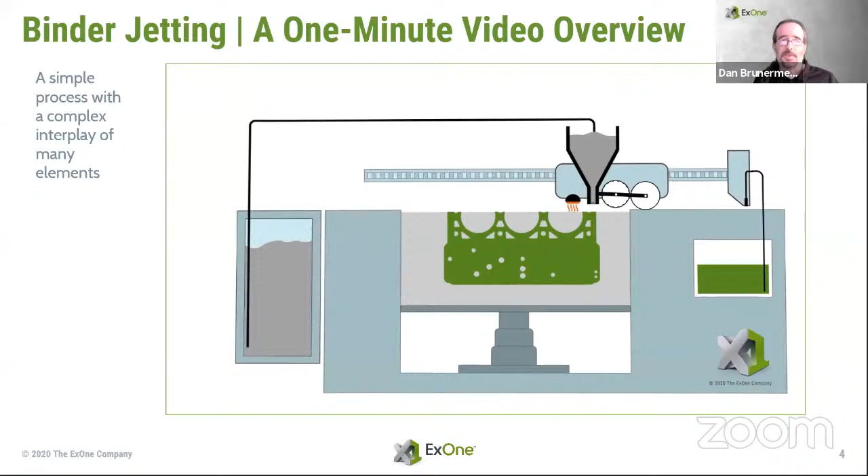So I'm going to talk about outputs and applications real quick. One thing absolutely unique about binder jetting is that we can create four different product states by nature of the process itself. We talk about bonded parts, meaning they're simply glued together and ready to go. We talk about porous parts, where maybe a slightly sintered or other process turns it into structured porosity.

We talk about infiltrated parts—the birth of binder jet metal was actually stainless steel powder infiltrated with bronze, but we do a lot more infiltrations these days that are much more interesting. And then, of course, highly sintered solid ceramic and metal parts.

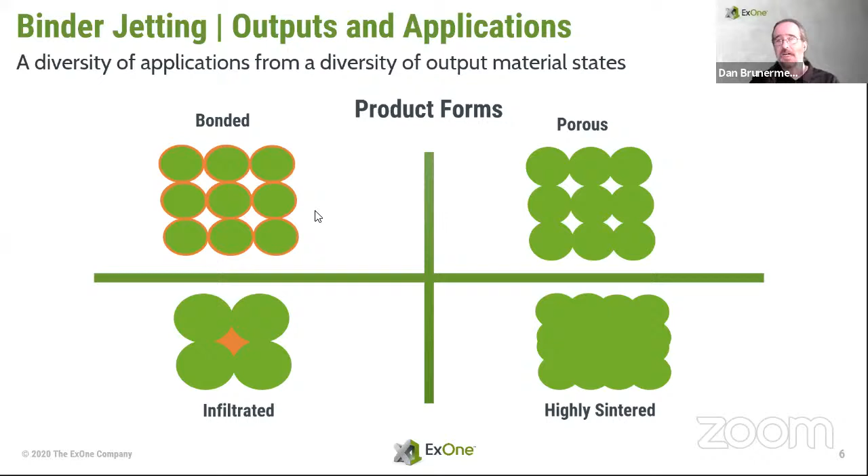Tying those product forms to some of our applications real quick: ExOne is the absolute leader in binder jetting for the digital casting industry. We also have a whole line of bonded products used for washout tooling for composite parts. In porous structures, we did a project last year with Pitt and ANSYS working on an N95 printable copper, highly tortuous, reusable filter.

With infiltrated, as I said, that was the birth of binder jet metal, but now we have this whole line of EPIC tooling and parts—that stands for Engineered Particulate Infiltrated Composites. And of course, we have highly sintered parts, either like what we've done with other partners in the past, or you can make solid tools with this technology because we can do tool steels.

Okay, so voxels and binder jetting—this is where I'll talk about the practicalities of what I'm personally interested in and why I'm using the Dyndrite engine and the voxelator. I get asked all the time about what saturation is and how it works. I've written several white papers in the last 18 years about it, and it's one of the key process variables identified in AMS 7022.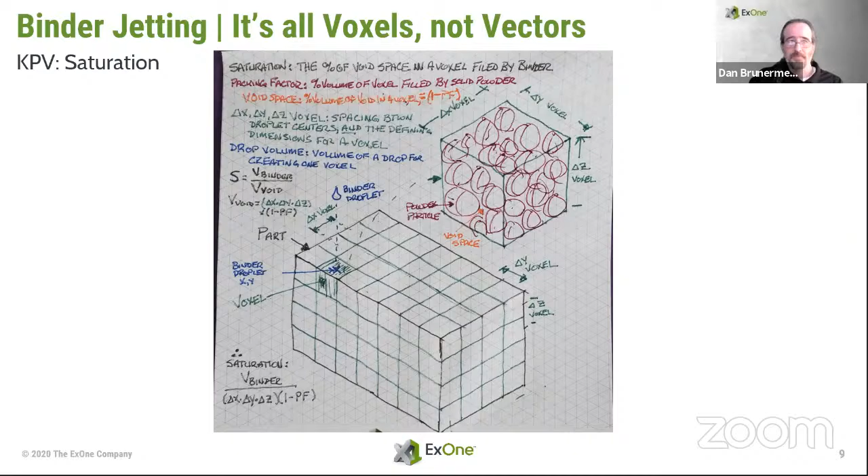But what I want to investigate regarding STLs and voxels is, with binder jetting, this is highly relevant if I'm wasting voxels. Binder jetting is really, really fast. So when we talk about scale of production, we don't mean the scale of an independent service provider, we mean the scale of a Ford, or some other big company making millions of parts. If you can save a couple thousand voxels on a part in a production application in binder jetting where the numbers are huge, it really can add up.

The way this got started for me, I've been talking to the HP team a lot lately about the UBM, and I'm going to be a beta member and give it a try with Dyndrite. But I wanted to try and think about what this really means to me as a technical person.

Because I'm a technical fellow, and certainly as a designer and engineer, I can appreciate things like tessellation and analog loss and all these different things we know happen with STLs. I can dive into a literature review and find scholarly papers that tell me all I could ever want to know about vectors and normals and deviations from surfaces. But these all have just kind of been leaving me wanting. I want to know exactly what we're talking about with these voxels, and should I care? Should my production customers care?

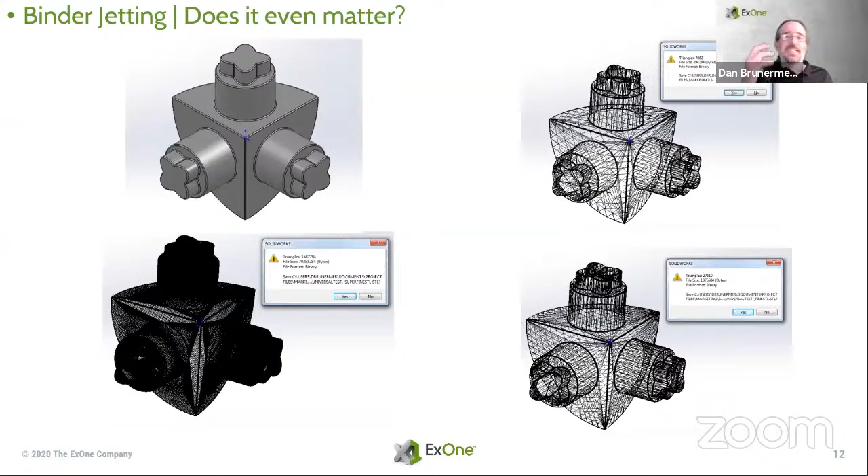But for today, all I can tell you is about the one practical, extremely practical, small technical question that I've been trying to answer for 20 years. Does it matter? I know this is a pretty impressive graphic, I did it myself in Paint, but it's just to try and show that we know there's a difference between a circle and an approximated circle.

And I know from my experience with STLs that generally the STL exporter is going to do something in a material safe manner. I just really want to know exactly how much excess material is there. And the Dyndrite engine really excites me a lot, because I feel like I'm actually going to answer this question in a practical way that has plagued me forever. For all I know, I may prove to myself it doesn't matter at all, but I don't think that's going to be what I find.

I think whenever I go through all the numbers—this part, I think it was like a 14 millimeter part total, so that means you can print somewhere around 750,000 of them a year on a 160 Pro machine. That's a rough number, I have to actually do the calculations. But the ability to save half a gram on millions and millions of parts, that's a really big potential.

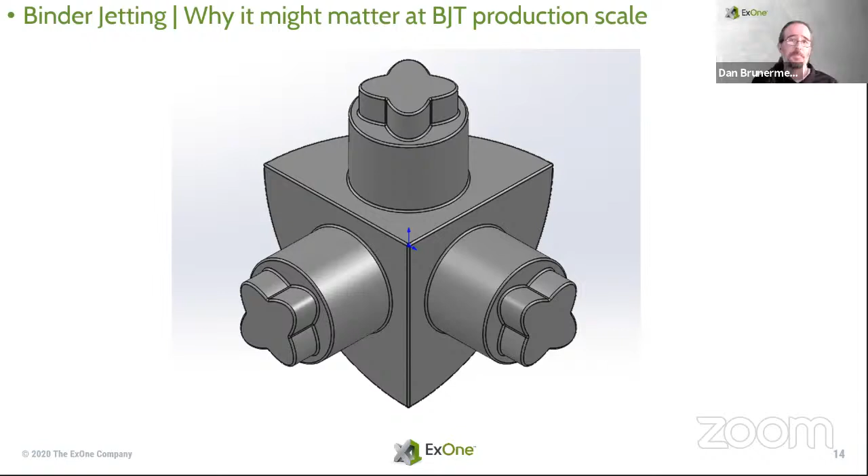And I think that it could be a bigger thing than we think, especially when we talk about things like sustainability and efficiency and all those kinds of aspects. And so, yeah, okay, there it is. I did that in 10 minutes.

So yeah, here at ExOne, we have a vision of sustainable manufacturing without limitations. Unfortunately, I'm in front of a really smart crowd, so there are in fact limits. But I'm really looking forward to working with this engine and with the universal importer, and really seeing what kind of difference this can make

Great, thanks Dan. So don't forget to submit your questions, but in the meantime we do have one question for you. In the presentation, you touched on the STL versus no-STL debate, and I was wondering if you had an opinion on where you thought this was going to go, where this debate was heading down the line, and what kind of hurdles we're going to see, and how they vary across different technologies? Obviously your expertise is in binder jetting, but I'm curious if you can compare them.

Well, yeah, definitely. I think... okay, I tell you what, I'm really not sure. I took this to a person who's an FDM person. If you think about FDM, you're essentially programming a series of G codes into a machine. There are G codes for doing interpolated moves, but there's also G codes for drawing circles. So which is actually better? And I said, can't you draw a better circle if you use the G code for a circle?

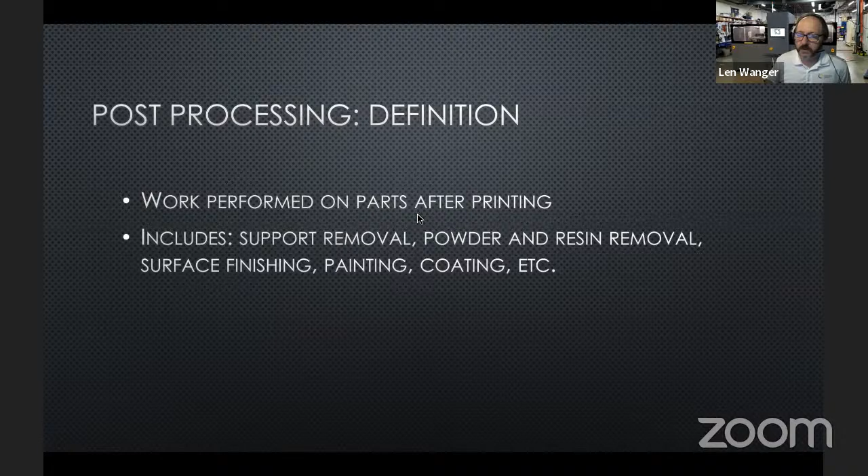Before we get going on the rest of the talk, I'm going to do a quick poll here and ask everyone - I don't know if we can present the poll here - what is the amount of the total spend on a part you think represents post-processing? I know it's geometry dependent, but put your finger up in the air and pick what you think as a percentage of the total spend.

Got it. Well, this is in line with the informal surveys that I do, which I usually say is somewhere between 30 and 70% of the spend. It's a large spread, but you can see here the biggest results were in the 40 to 60% range. If you think about it, that's a huge amount of our part cost. And the reason is, I don't know why they...

Can we go back a slide here? For some reason it advanced on me. Oh, going the wrong way.

Okay, thank you. Problems with post-processing - it's a very labor-intensive process. We have lots of people with sandpaper, bead blasting machines, and coating machines. So that's where a lot of the cost comes in, that it's manual labor. It's also, we run into repeatability issues because it's people doing this by hand. We'd like to talk about the lights-out factory, but that means we're going to have a lot of people sitting in the dark for part production, so that just doesn't work.

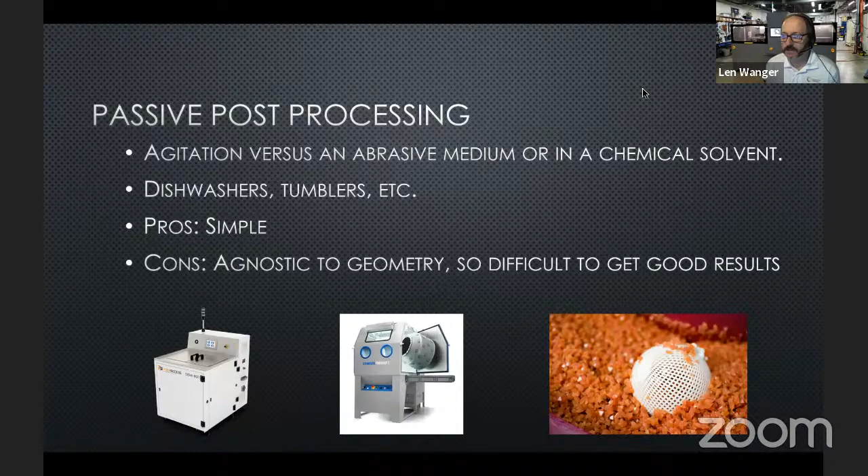There are a lot of post-processing technologies out there already. Two main classes I talk about: one is passive post-processing—things like dishwashers, where you use chemical solvent and agitation to run on your part, and tumbling systems. These tend to be simple and agnostic to geometry, so they'll remove material, but a portion with more material that needs removing might not get it, or a delicate part of your part gets the same treatment as less delicate parts, which can actually cause part damage.

But if you think about what we have in additive, we always have a digital model of the part. So the question is, can we use this to dynamically create the paths we need for post-processing? Not surprisingly, the answer is yes.

The first step is we need to come up with a model—this is the most complicated piece of the process. The model is for the amount of material either added or removed—in this case, I'll talk about removal, or abraded away per unit of time. You'll have input parameters, which is a lot of the complexity here. This will be fairly specific to something like a blasting process: pressure from the head, distance from the head to the part, the dispersal cone—how large an area your beam covers—and the medium being blasted, whether air, water, or grit, plus the model material and support material.

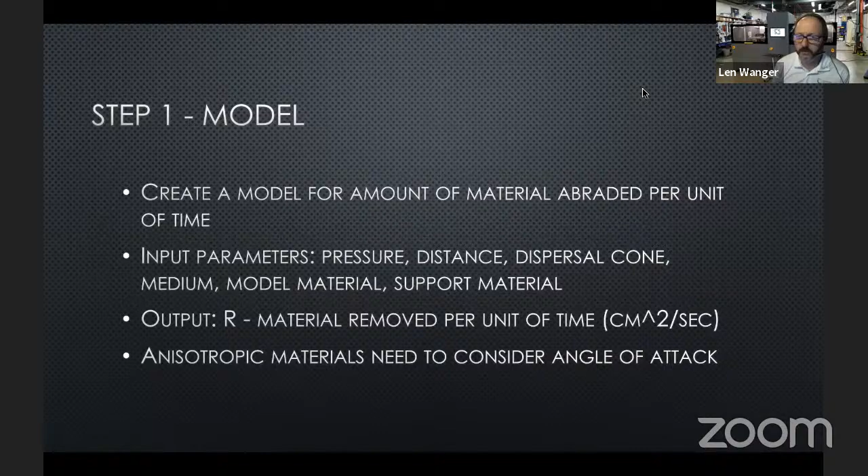The output of this model, which I'll call R, is the material removed per unit of time—how many square or cubic centimeters per second you'll remove. Because our materials are often anisotropic in additive, we also have to worry about the angle of attack—hitting it straight on the XY axis versus at an angle may give a different R value. A simplified picture: in yellow is the rectangle for the blasting head, with a dispersal cone shown as the orange flecked area, hitting at an angle theta, removing material as you work toward your part.

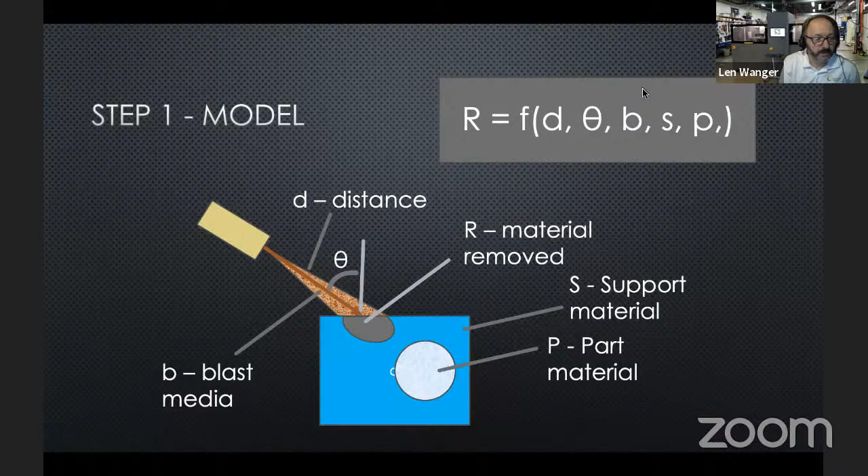The second step is you have to have your part registered in space so you know what you're hitting. This is probably the easiest part—here I'm showing a datum point on a work holding fixture. There are a lot of ways to do this; you could use vision systems, but the easiest thing is to use work holding.

Step 3 is calculating the depth of the material. I've got two depths I'm worrying about. One, called D1, is the distance from the blasting head to the build block, the support material. The second is the amount of support material, the depth there that you're blasting away.

Now this is where we start to think of the word GPU. How do we calculate these distances? We have the geometry of the build block, and we can use methods like ray casting, or rendering and reading back from the Z buffer. If you did a Z buffer, you'd have to render twice, once with the support material and once without. But luckily, we can use these digital models and fast rendering techniques to measure these distances.

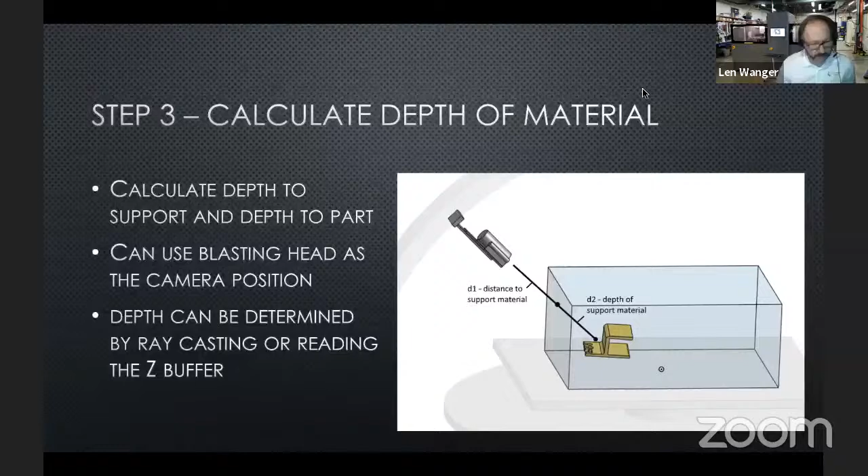A second extension we can do is create an active feedback loop. The models are difficult, but we can use them as a first estimate of how long to apply the forces to abrading away the material. If we're able to put a rangefinder at the position of the blasting head, we can measure the actual depth of material and keep blasting until we reach some tolerance within what we want for the part. These processes are often dirty environments, so sensing can be difficult, but if you can do it, that can be a simplifying factor and help increase accuracy.

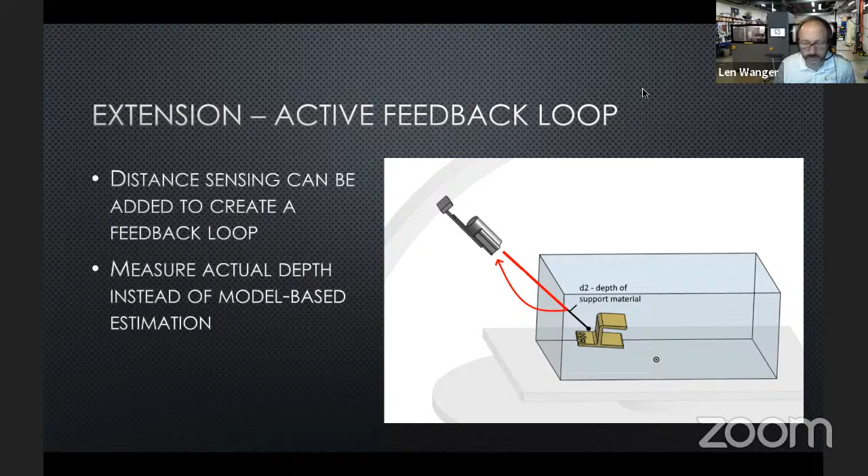As I mentioned, this is a perfect opportunity for the GPU. GPUs aren't just good for slicing, right? We can use them wherever we need to interrogate the geometry and get information on it. This is again an area where being able to differentiate with metadata between different materials, supports, models, etc., can be useful. We can also, if you want to increase complexity, apply various simulation techniques to get more complicated but more accurate calculations of how much energy to apply, where, and from what angle.

We are applying this to the Impossible Objects CBAM printer in our factory. For those unfamiliar, it's an industrial printer for composite materials, carbon fiber and fiberglass in particular. It's a fast printer that produces strong, light parts. It's similar to a lamination process where we start with sheets of material, inject polymer powders, vacuum off the excess powder to leave just the slices, stack them up, press and heat them, and then abrade away the uncoated portion of those sheets.

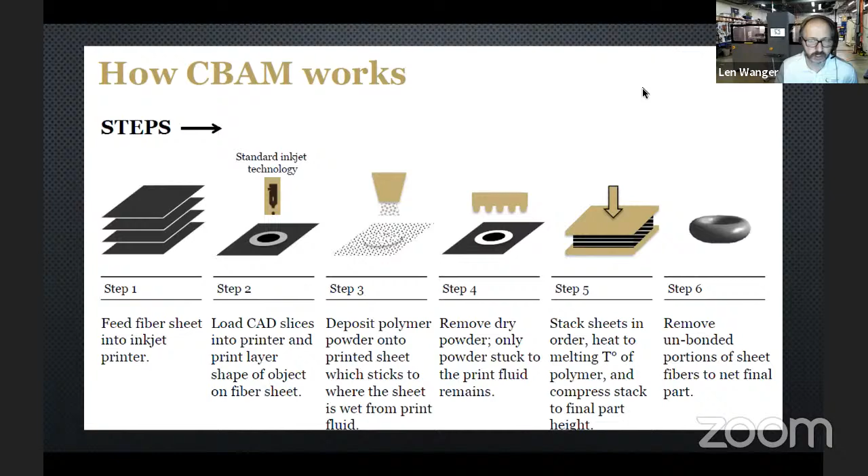Here's an experimental rig we've built, used both for measuring abrasion of material to nail down our process parameters, and for experiments on automated cleaning of parts—quite successfully.

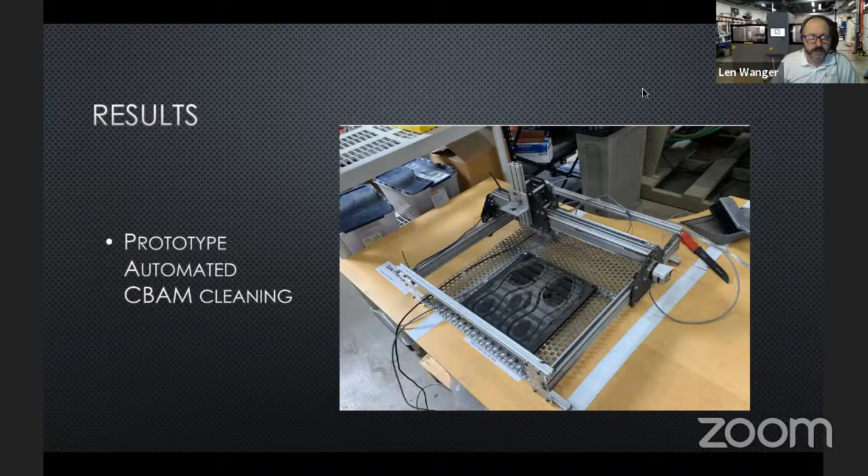I know this was fairly quick, but I'll open up the floor to some questions. Here's some contact information if anyone wants to get in touch with me.

All right, great, well thanks, Len. We do have one question here. This is related to earlier in your presentation: how much of this AM process is process specific? For example, could cold spray be replacing SLM and powder bed fusion due to low post-processing costs, or FDM with soluble support versus SLA? Do customers balance material needs versus post-processing costs?

Well, the process you use to create the part is going to be highly dependent on your application, your tolerances, your material specifications, and your surface finish requirements. With post-processing being such a large part of the spend, that's going to be a large factor in your decision tree on what process to use. Over time, you've seen things like soluble supports, which were a great breakthrough to reduce the cost of support removal, and that's terrific for FDM parts. Unfortunately, we've looked at materials that are chemically resistant, so it's hard to come up with a solvent, particularly one you'd want to use, to do a chemical removal.